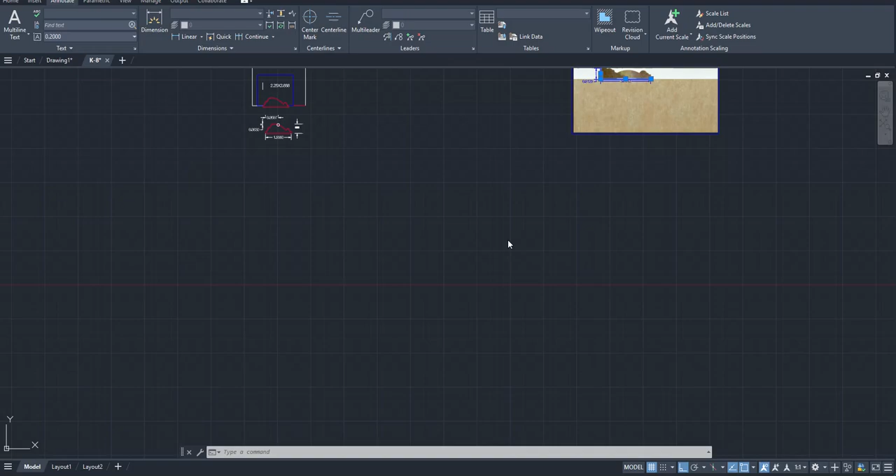Today we are going to talk about drafting molding.

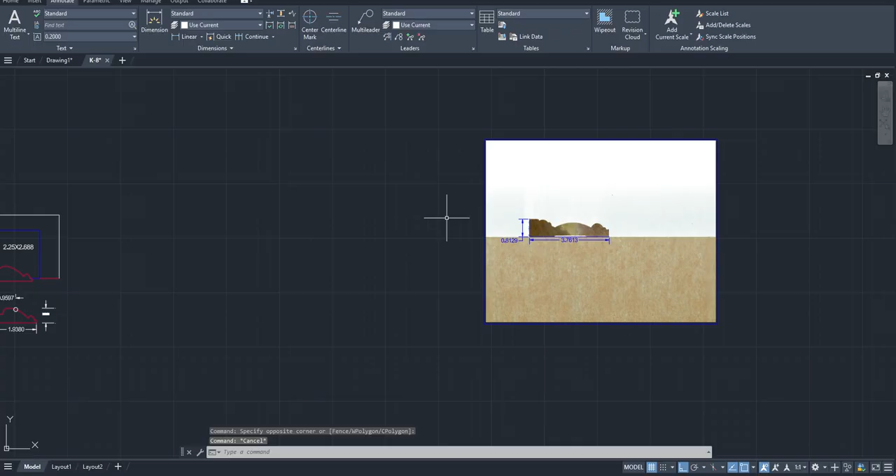Now I'm doing this at home on my home computer, so if you hear a little 5 or 3-year-old monster run in the room, those are my kids. I just put them to bed, but any parent knows that doesn't mean anything. So, all right, let's get started. I'm gonna try to do this in one take.

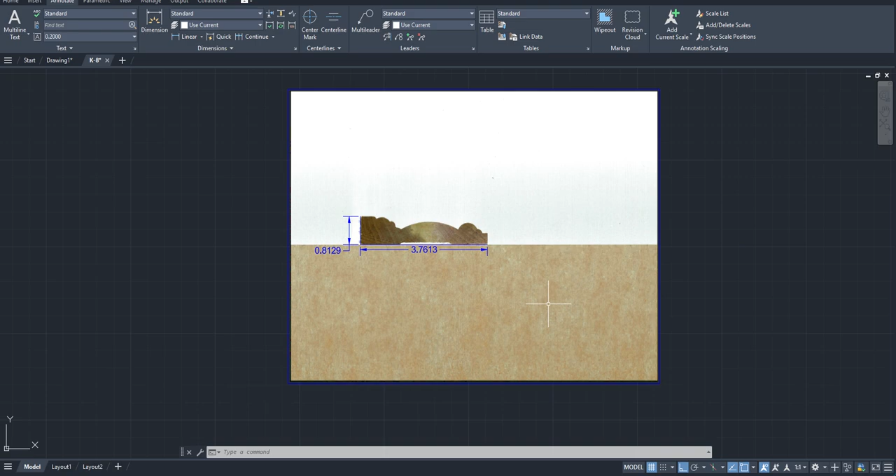So what I do, and please drop a comment below how you guys do it, but how I do it: I take a cutoff, cut like a half inch thick piece of molding, put it on edge so that's the end grain. I put it on a flat, perfectly flat piece of material that I've cut on the CNC at our shop, and then I scan it. Then I go ahead and take calipers and mic the thickness and width. That's why it's 4 decimal places.

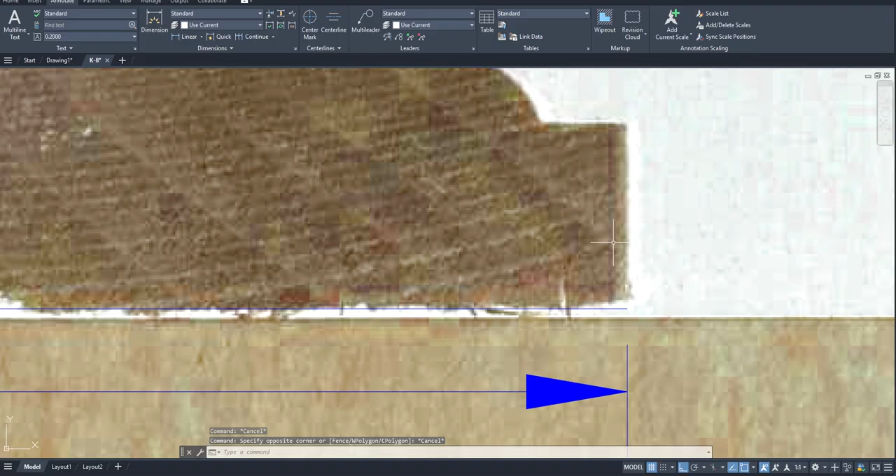It's as accurate as you can get it and as close as you can get it. At the end of the day, you are eyeballing it. Sometimes there's a little shadow. I wish my crosshairs weren't white. I always trace it in blue or red to help with that.

But that's what I do. I'll give you a sneak peek. This would be a finished product of a different molding.

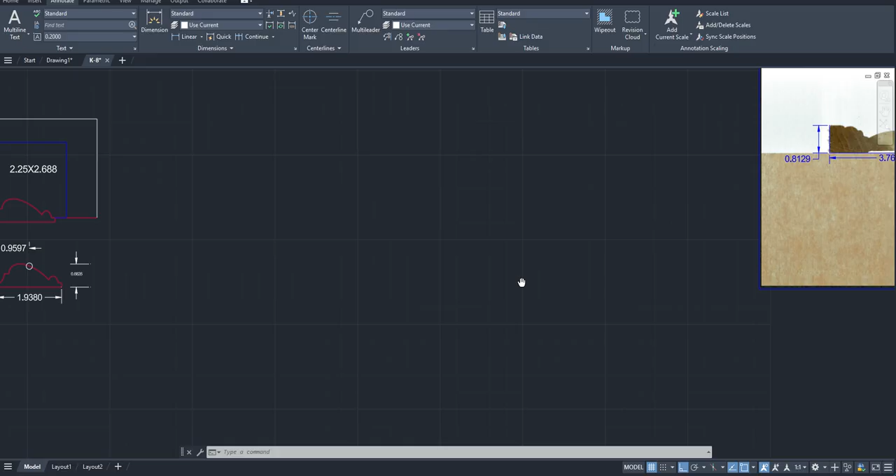And I won't bore you with too much detail, but I've seen people that have shown me in the past. I would actually go through and dimension all these out if I was really doing this for the big show, but I'm not gonna do that. Just gonna eyeball it, freeball it.

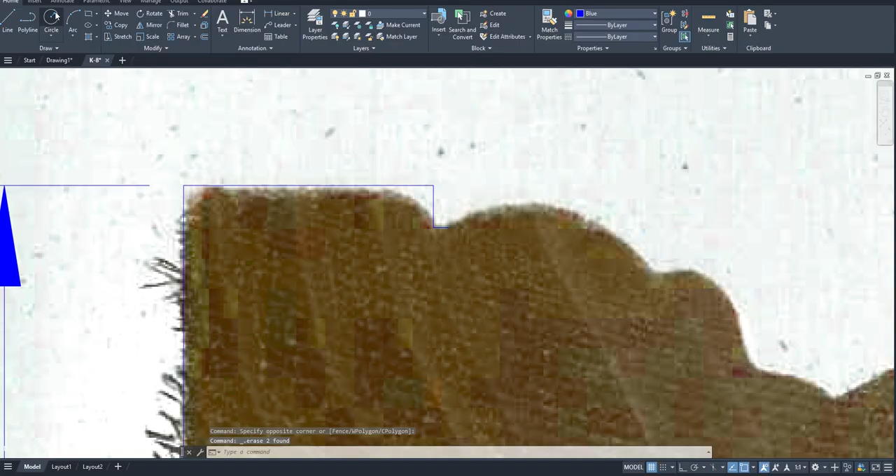What I was gonna say, I'll show you. What I've seen some people do, if I take my ortho off, is they literally draft in circles, and I'm not gonna say names on who showed me this, but they're a wizard, and they could literally join the arcs together perfectly. I can't do that. I'm sorry. I'm not that good. Call me old school.

But this is kind of what I do. I'm using AutoCAD student version from my college days, but you can use just about anything.

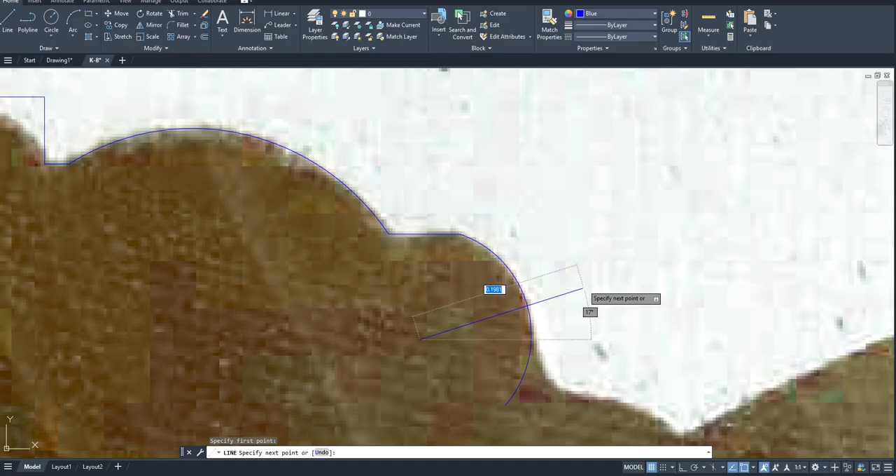Don't love that. Don't love it, but pitter patter, let's get at her. Yeah, sometimes I get in the zone. I don't love that either. I don't love it. I don't like it. I'm not married to it. What?

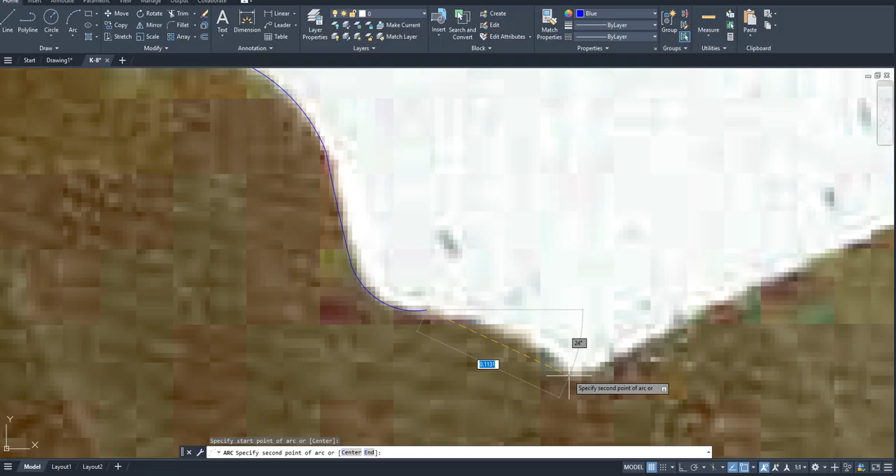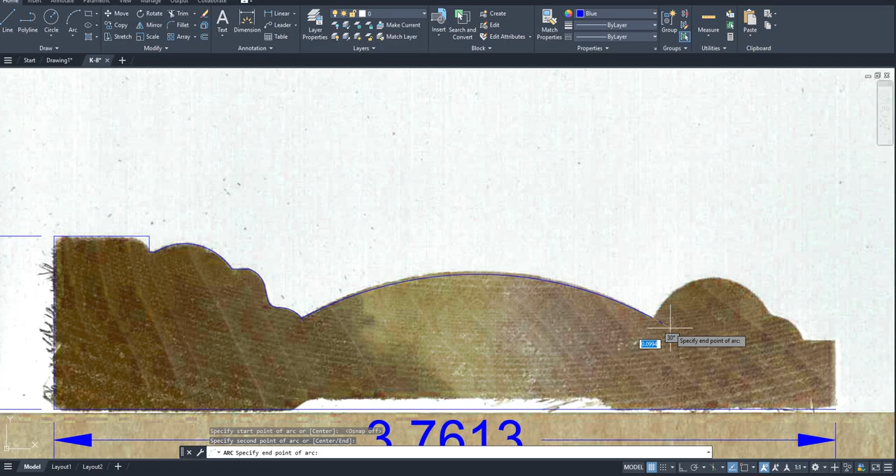We'll clean her up. Yeah, like the scan, I would call that scan noise. I've tried to refine our scanner, and really sometimes you gotta turn snap off. I've really tried to dial in the scanner, and it's close enough for now. I tried to dial in the scanner and just can't get it much more refined than that.

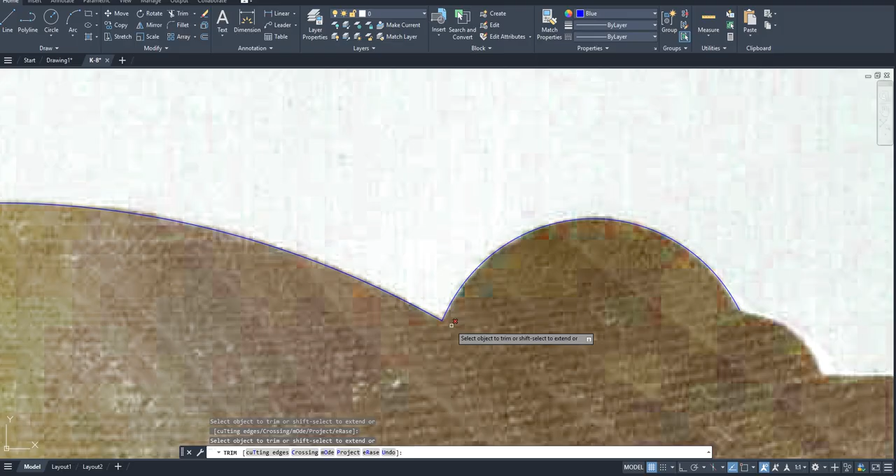But yeah, this is gonna be a quick video. I didn't post one last week. It was Easter weekend. I was out of town, and I didn't want to rush anything. That's the worst. I feel like you guys would definitely know when it's rushed, and that's gross.

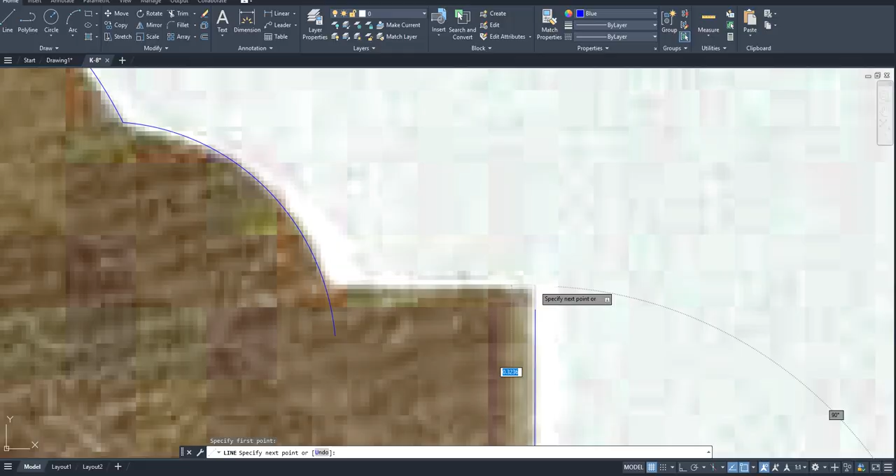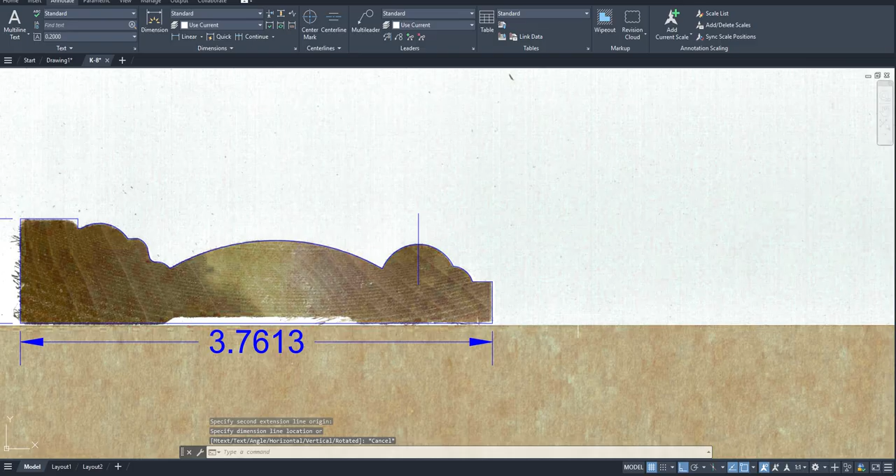But it's not all about the shop. I would definitely want to mention this: I'm just literally eyeballing this whole drawing right now for this video, but it's ideal to use your calipers or micrometer, whatever you want to call it, and go through, measure that point, go here, measure your highest point, and make sure that along the way you're hitting your points.

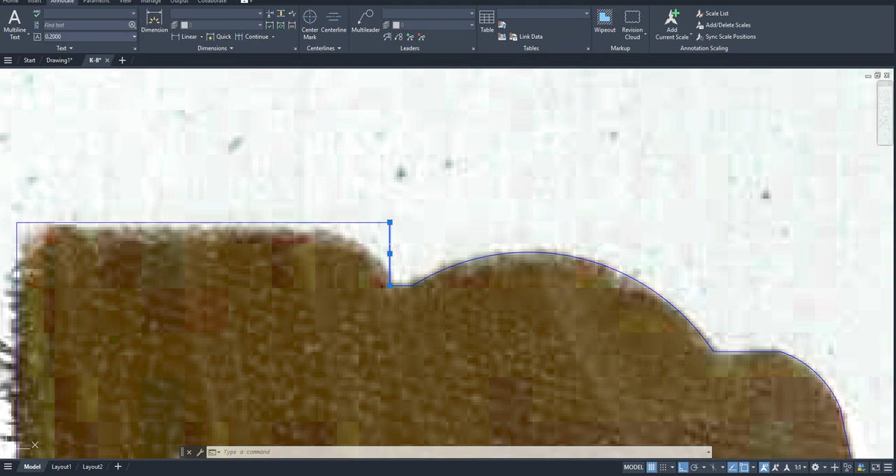So one thing about tooling is you cannot have, well, you actually can. On our Weinig grinder, you can use a square grinding wheel, but we have a really good grinderman at work. This just heats up too much. There's nothing he can do about it.

So, a little fun fact for those that don't do this: 2-degree bevel.

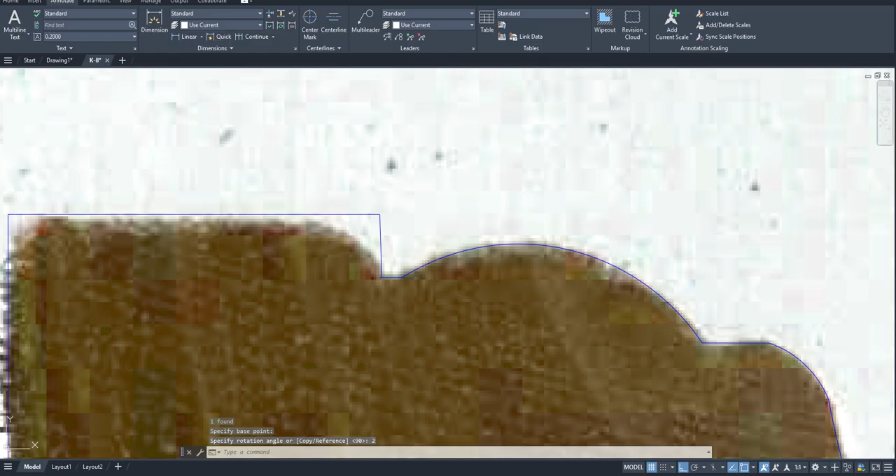This desk at home is shaky. My wife uses a stand-up desk, and if I just lightly press on the desk, it shakes. It's driving me nuts. Let me try this spot.

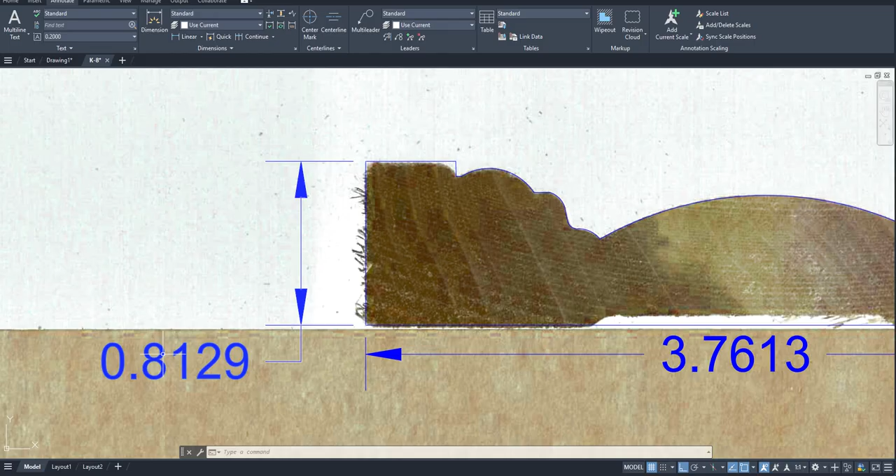So that line's a little high. That is okay. When we're setting up the machine, if it is a hair—I mean, we're zoomed in a ton right now—if it seems like it's a little high, and when I say a little high, I'm talking maybe the profile instead of 8129 is actually gonna, right now it's 8129, but when we set up the molder, we could literally take this down to like 810 or 807, 5 thousandths, and it'll clean that up.

So what I do on this, fillet, and it's just kind of guessing sometimes. Let's try an 1/8. Oh, too much.

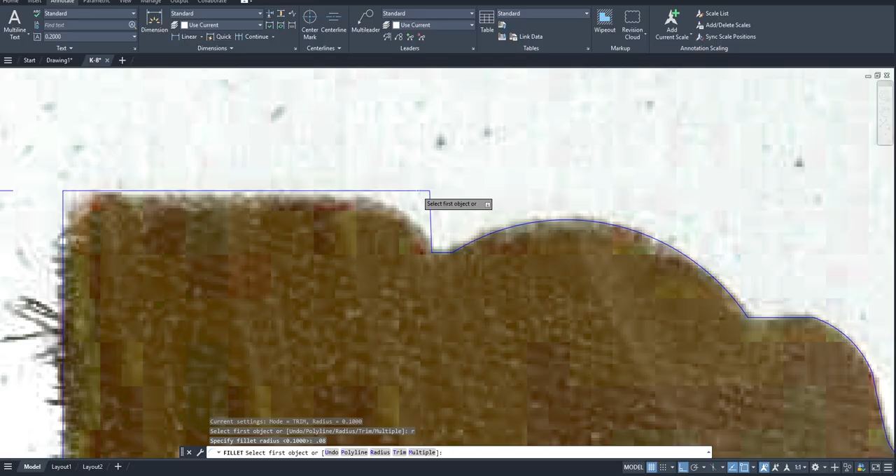AutoCAD will kind of tell you, hey, it's too much. I like to use actual geometry. I've seen a lot of samples over the years that were probably hand planed, and what's going on with this one here? Or just people tracing with arcs.

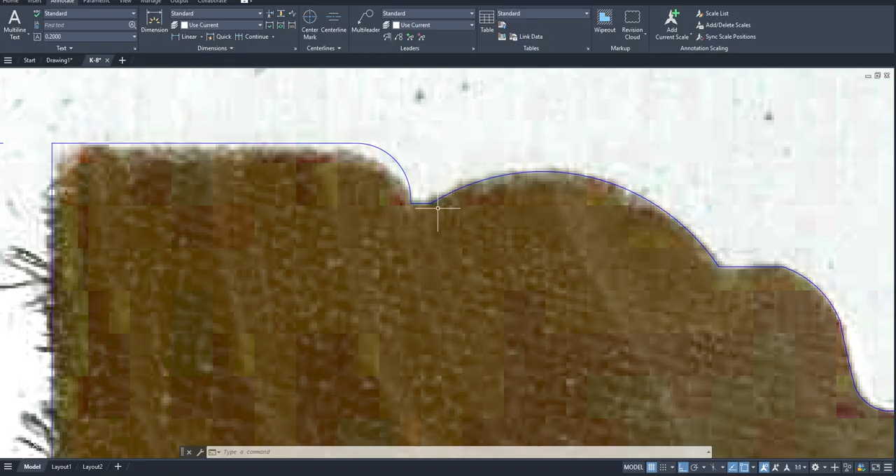That should be... oof, man, I feel like I could get that better. So one thing to notice, I'll work on this, but that's how I draw it. Like these inside corners, even this one here, you can put a fillet in there if you want, an inside radius of 0.02.

Won't even let you. Why is it doing that? Normally I don't have these issues. Of course, when I record, I do. So, like that, I would even smooth that little radius out there. Perfect.

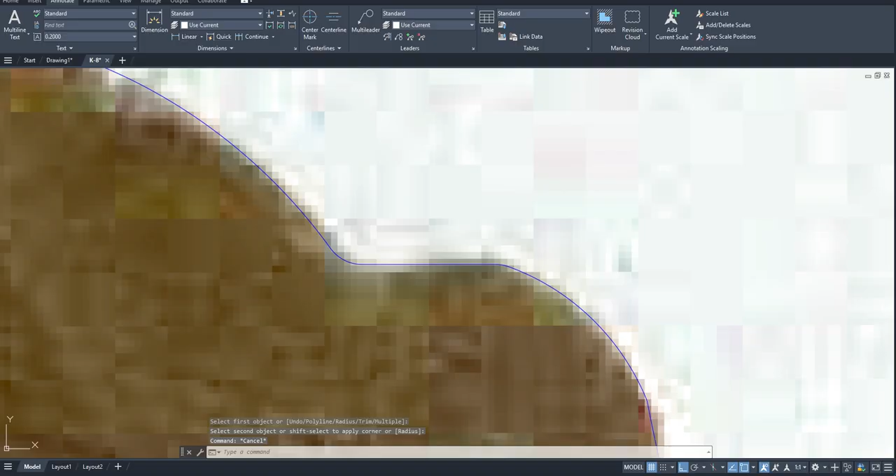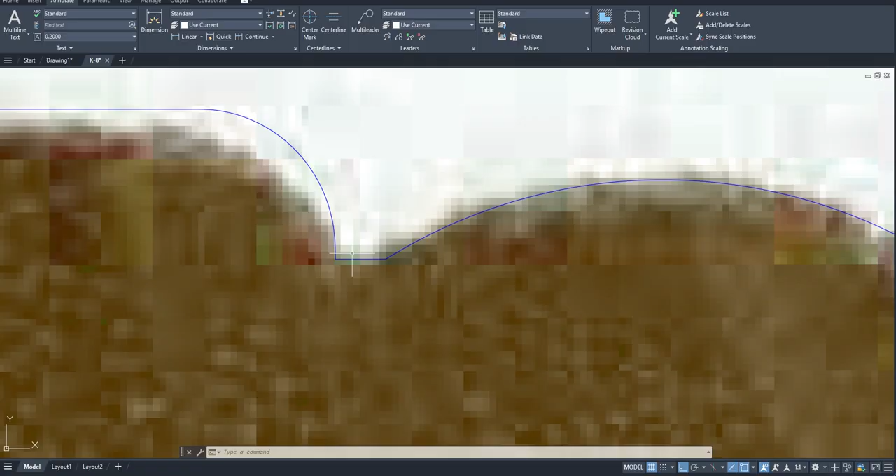You can, like I just did over here, put that .02 radius, or your tracing pin, the smallest one, typically is 2 millimeters. It's going to round that corner off when you're coming through with your tracing pin coming down. So you can either draft it that way or just leave it like this, and your 2 millimeter is not going to reach there. We do actually have a 1 millimeter grinding wheel, CBN wheel, so I guess you could use that one and get it as tight as possible.

But just to recap, having that 2-degree bevel really helps with the knife not heating up as much. So that's a quick little deal there.

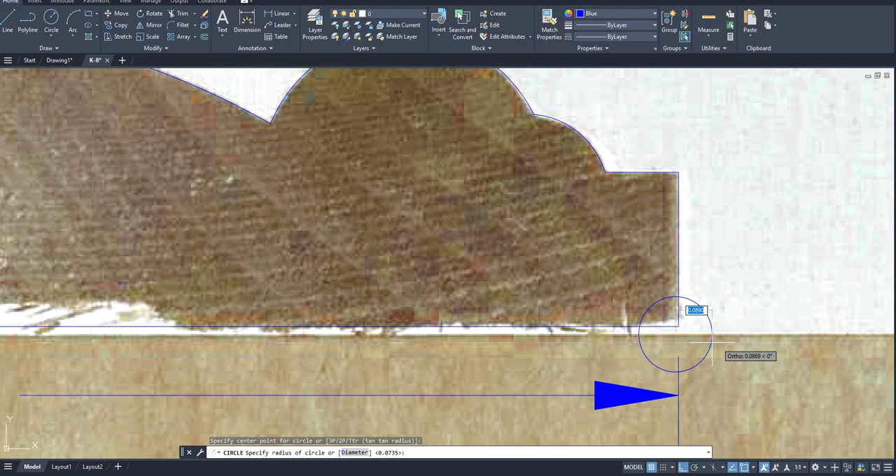That's my trace, and I guarantee you this, like, you can see the material was warped a little bit, so it's kind of coming up off the page here, or off the flat edge. I guarantee you, if I went to the printer, printed this off, and laid this sample piece over it, it would be a 98% match.

The only issue I don't love is this radius. I could just do individual arc and get it even tighter. But for the video, I'm going to leave it, and we will shoot over here.

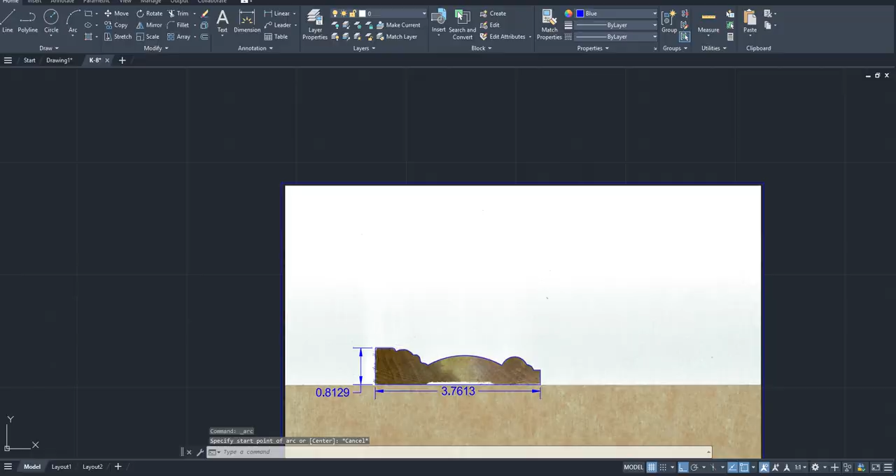So this is the finished product. Oh man, so I drafted this in red, and then I forgot to change my layer, and it went back to white. But this white line, we'll say, so these three, and then this line and this line are your templates. That's your template.

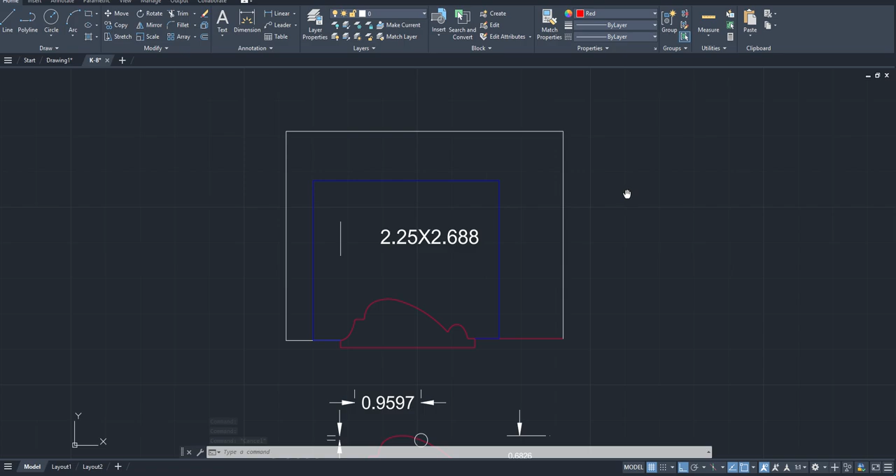Rule of thumb, always make a template 4 inches wide. And then your template depth is taking the highest point of the profile plus 2.362.

See? Not just making up numbers. Sadly, I have all these numbers memorized, drafting 1,000 profiles over the years. So that's how you get your template depth. It's always 2.362 above your highest point, which would be your max depth of cut.

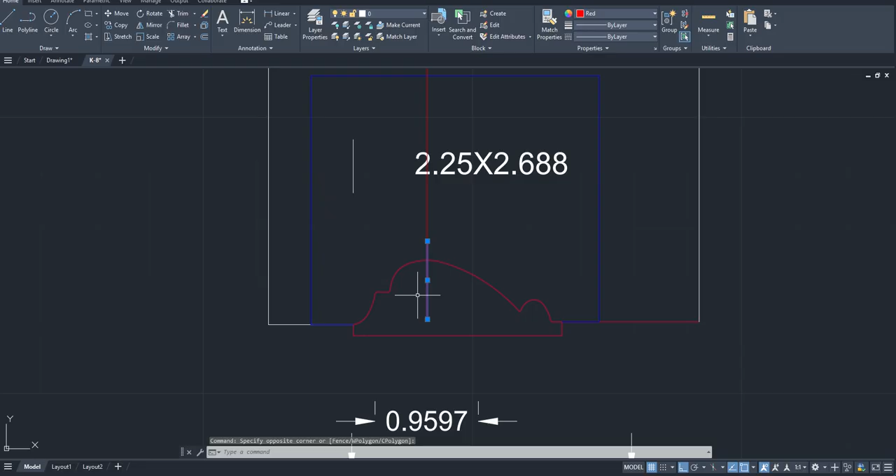I always thought when I was a kid that I was dyslexic, and now, with the fact that there's minimum radius and maximum radius, staring at tooling all day, that is your minimum radius. I'm sorry, I said max depth of cut. Your max depth of cut would be all the way down here.

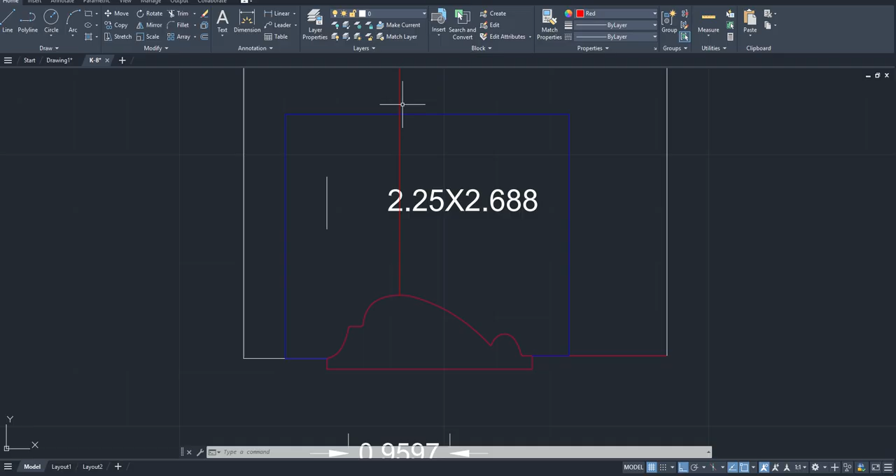Okay, so from this point to that point is your minimum radius. I literally thought I just had a camera here and I was putting my hand on the screen pointing. So still learning, ladies and gentlemen. All right, so that is your minimum radius.

If you come down here, oh, and I forgot, look at this slacker. Oops, A, and it's going to be in red, and we're going to keep it. So this would be your, what I call, running profile axial.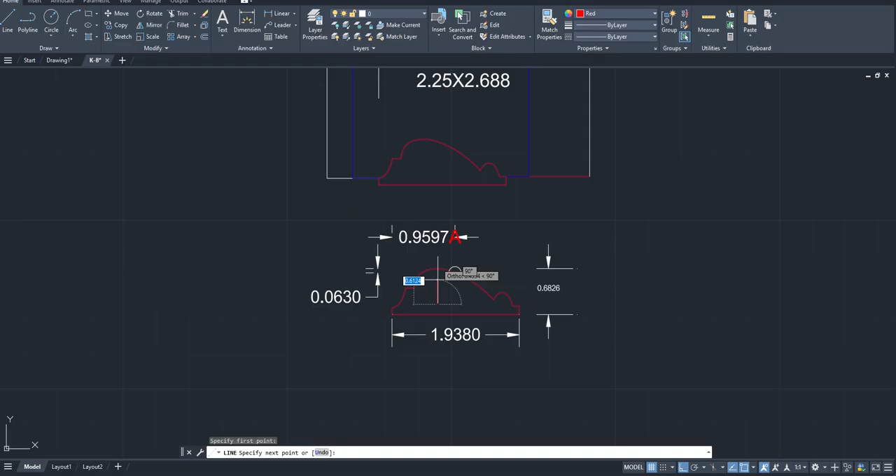How did I get to that number? See this 16th of an inch, how did I get that? Well, again, we find our minimum radius.

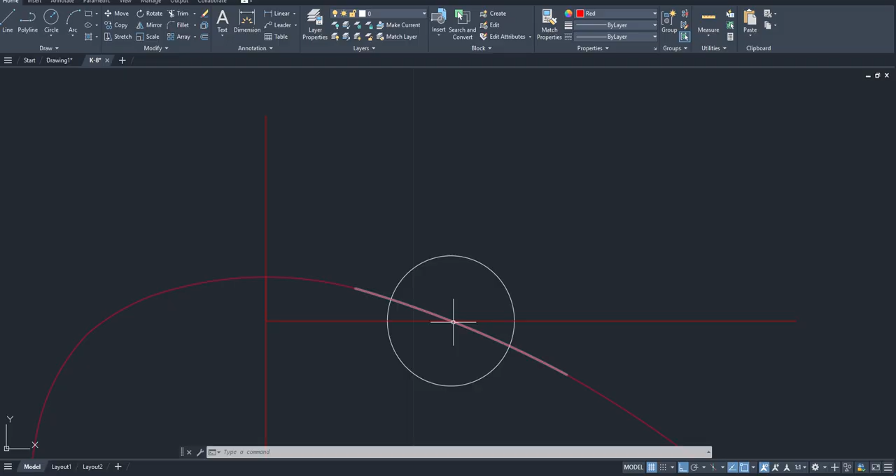I said, I'm telling our grinderman, come down 0.063 and then go to the right until you hit the tool. So right in here, when he looks on the optical comparator in the grinding room, he's in space right here. He's in white space. When he goes over this line is where he will hit the tool. So that's a radial movement, 0.063 down, and then just go over till you hit the knife, and then hit save on the computer. When he does that, when he hits save, wherever he hits the tool, that would be our tool axial. So in a perfect world, we run our tooling off of 10 millimeters, or 394.

So that is probably on the optical comparator in the grinding room, 1.3537. And I think in the grinding room it's 3 digits, so it might round it up to 1.354. That would be his tool axial. Okay, what the machine is doing is taking your tool axial minus 394, which gets you 0.9597.

This is how, when you're running a Weinig moulder, you can set up the profile efficiently and accurately every time, even after sharpening the tool, because we're using the same math every time. The dimensions over time, when the tooling gets reground, will change.

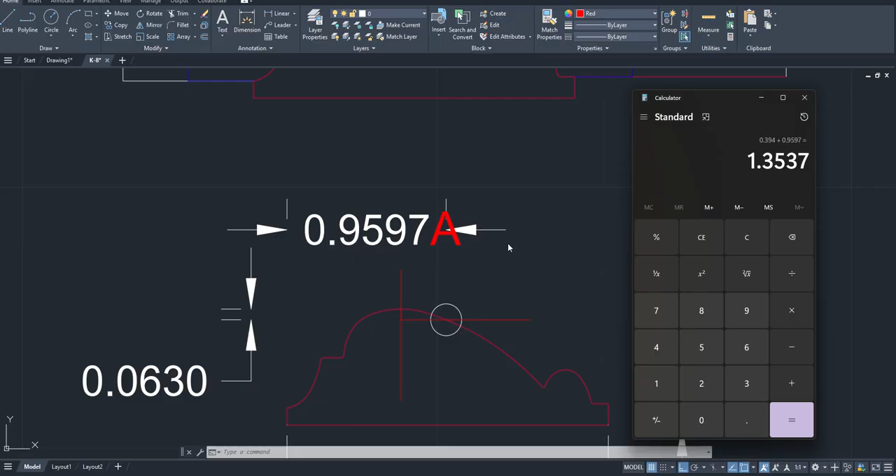Your min and max will change, but doing a movement like this, 0.063 down until you hit the tool, that will guarantee that when this number changes slightly after a regrind, because we're using 394, it will always position in the machine correctly. That's the beauty of Weinig's axial constant system, and why their machines are so accurate.

At the end of the day, the grinder man has to do a good job, but even if he or she doesn't grind at a perfect 394, within reason, let's just say if you were even within 0.03, that's okay.

Oh boy, I just got interrupted and lost my train of thought.

But that is the beauty of Weinig's system, if you use this correctly. If your grind is even off 0.03, let's say, as long as you make that movement, go over and hit save, that's okay. So maybe on the machine it doesn't come out to 394 for your axial. For this would be the second top head. Maybe it's 0.42. That's okay. It doesn't matter because you measured it correctly to a reference point that makes sense to the tool. So it's going to run correctly.

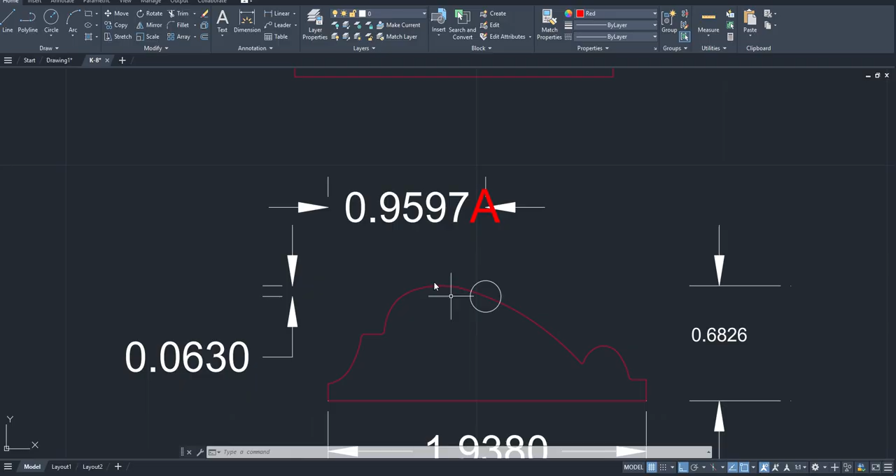Every now and then we have to make micro adjustments, 0.01-ish. Also, that could be that your machine itself is out of calibration. That's why it's good every year to have a PM done by a Weinig technician. They can recalibrate your machine, but also you learn that in the class, so you can do that too when you go to Weinig.

So just to finish up, this right here is saying the dimension of the tool. That's your blue line. 2.25 is your depth. 2.688 is your width. How did you get there?

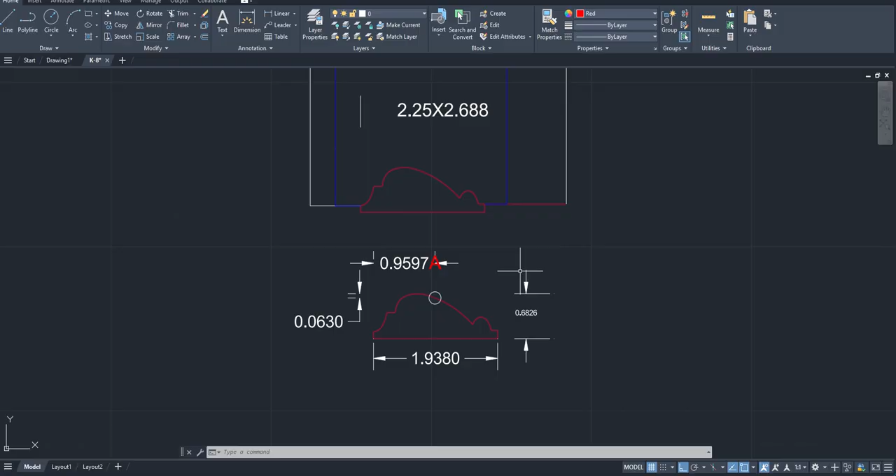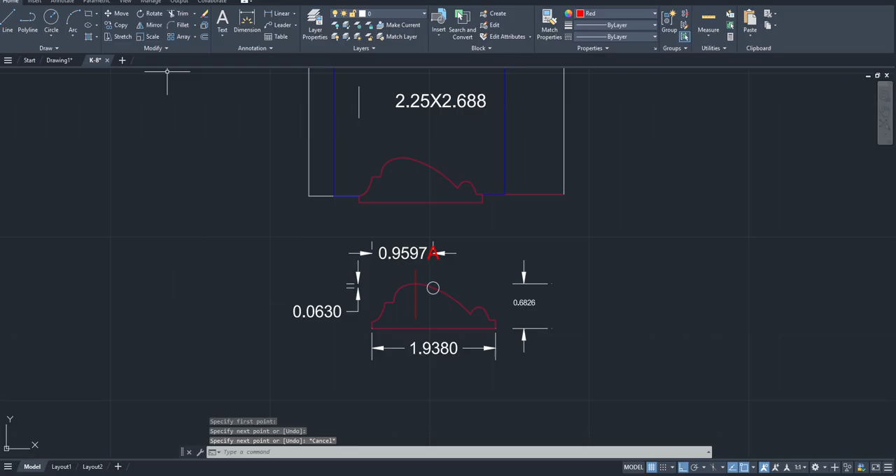Well, this will be the last one here. So your depth of profile, I call it depth of cut, is 0.5821. You're finding your minimum radius to your maximum radius, essentially. 5821.

0.5821 plus 1.5 is what Weinig tells you to use. That's their formula. So you're at 2.08 for your tool needed.

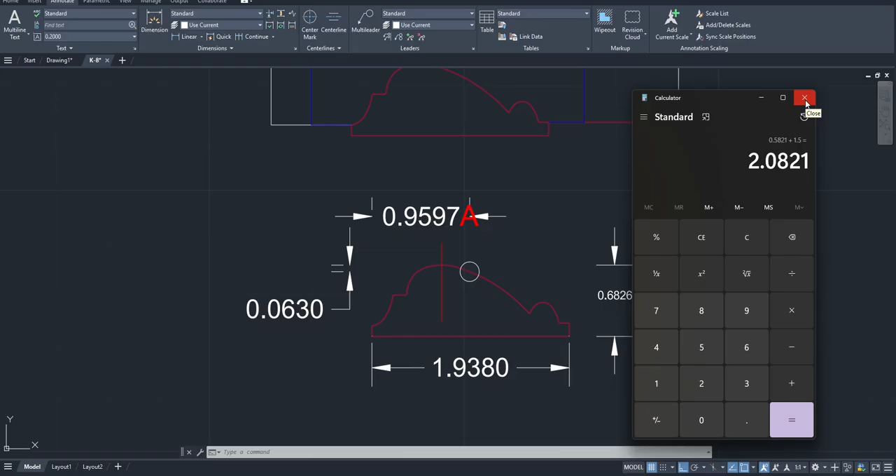Well, you really don't want to round down. That kind of throws off this whole measuring system. You should always round up. Why should you always round up as well? Because then you can get more life out of the tool. You get way more sharpens if you round up. So 2.08 to the next 1/4 inch, because the steel is sold in 2, 2.25, 2.5, 2 3/4, and I think that's the largest that I know of that our machine can handle. So 2.08, the next 1/4 inch of steel that we stock is 2.25.

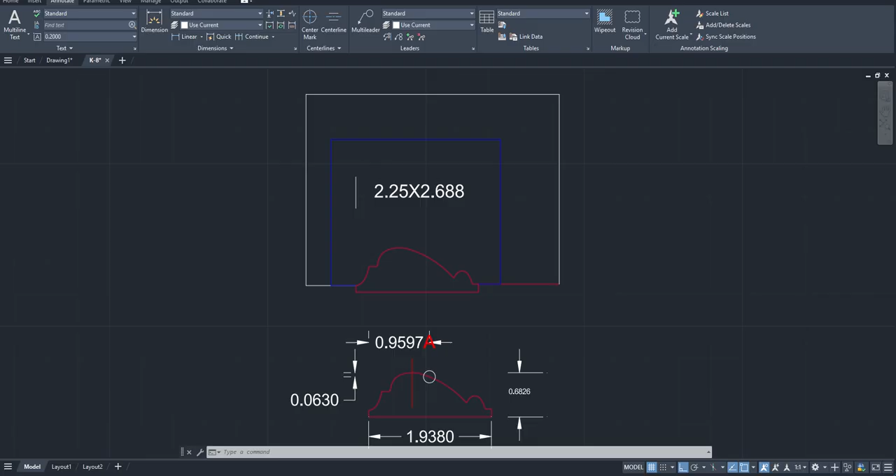So that is it. This is how you draft on a molding, and then turn it into a template and a tool. Then we take this file, we send it to the water jet, it rough cuts it, then we take it and we put it in a tool holder, a Weinig tool holder, and we do finish passes on it. So we do a finish roughing pass and a finish pass at 25 degrees, and we do our side clearance.

The water jet does not do the side clearance perfectly, so we have to go in and do that still manually on the grinder. But I hope that helped.

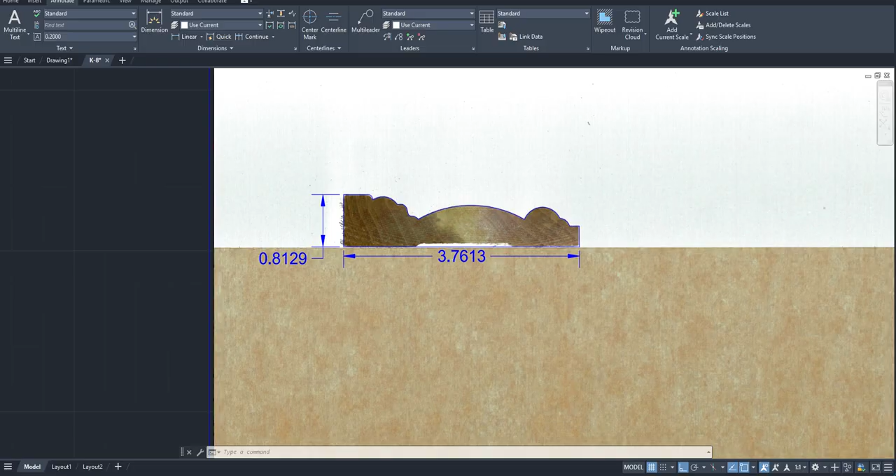This was kind of a real nuts and bolts video. If you have a more efficient way of drawing molding, please let me know, and I would love to try it out. I'm always looking to find ways to draft faster and more efficiently.